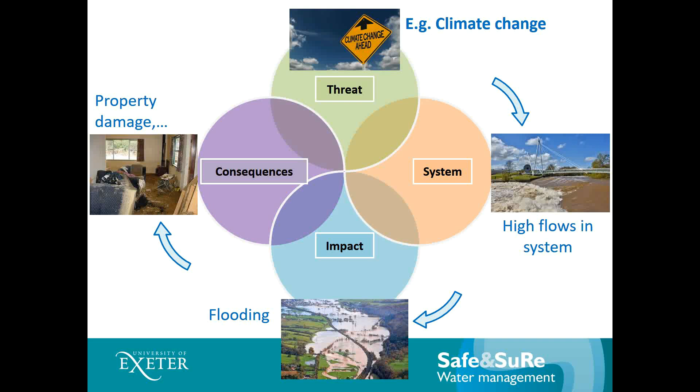And then using this framework, we can try and work out how we might reduce the consequences resulting from any given threat. So firstly, we could look at the intersection between the threat and the system, and our first opportunity to intervene here is called mitigation. So we've tried to define all of our interventions very precisely to make sure we're all using the same language. So mitigation we've defined as any physical or non-physical action taken to reduce the frequency, magnitude or duration of a threat. So essentially what we're trying to do here is reduce the size of a threat.

So if climate change was our threat, we might try and mitigate it by reducing our greenhouse gas emissions, and so then hopefully we'll reduce any effects on the system. However good our mitigation measures are though, we're still likely to have some effects on the system. So then we need to move a bit further around the framework, and we could start thinking about the intersection between the system and the impact.

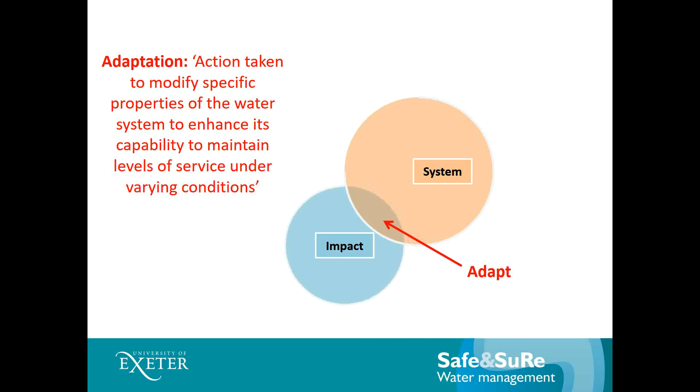And our intervention here is called adaptation, which is action taken to modify specific properties of the water system to enhance its capability to maintain levels of service under varying conditions. So essentially what we're trying to do here is minimise the impact. So coming back to our example, if we've got increased flows in the system, we might need to build flood walls, and then hopefully we'll minimise any flooding resulting from these increased flows. So these adaptation measures have to each address specific system failure modes.

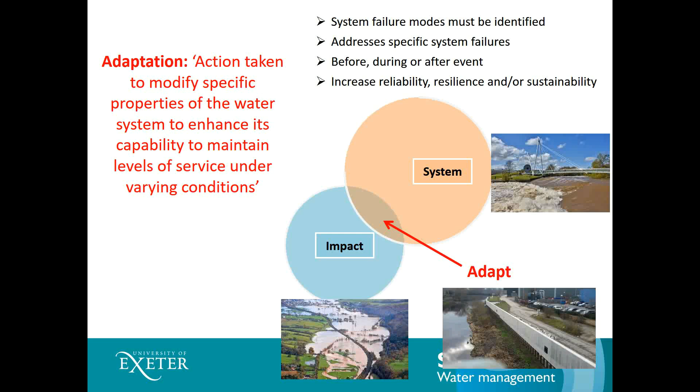And then, as before, however good our adaptation measures are, there are likely to still be some impacts at some stage. So with whatever adaptations we want to use, there will probably still be flooding sometimes. So our next opportunity to intervene looks at the intersection between the impact and the consequences. And this intervention we've called coping, defined as any preparation or action taken to reduce the frequency, magnitude or duration of an impact on a recipient. So essentially we're just trying to minimise the consequences of any given impact here.

So back to the flooding example, if our consequence is damage to the property, we might try and introduce property level flood mitigation measures to try and minimise these consequences. So that would be an example of a coping measure.

Then still, however good our coping, at some stage there will probably still be some consequences. So lastly, sort of completing the circle of our framework diagram, our last intervention is learning, which is embedding experiences and new knowledge in best practice. So essentially that's reviewing all of our interventions and improving them for the future.

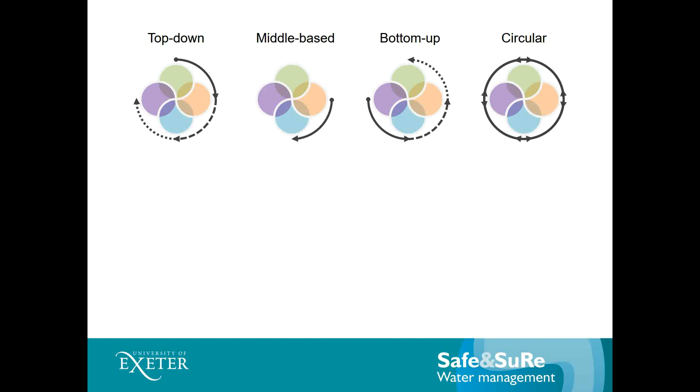So now we've got this framework, there are several different ways we can use it. So we can work with a top-down approach, a middle-based approach, a bottom-up approach, or a circular approach. So just to look at each one in a little bit more detail, starting with the top-down approach. So this starts with the threats and focuses on mitigation of these threats.

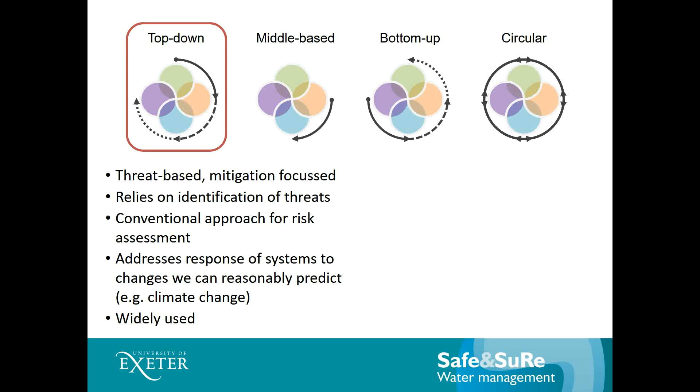So this is the sort of conventional approach that would be used in risk assessment, and it's good for addressing response of systems to changes that we can reasonably predict. The main problem here, though, is that it relies on us being able to identify the threats. So it's not so good for threats we can't foresee, or perhaps ones that are very uncertain or we don't know probabilities of. So yeah, what about the threats we don't know about?

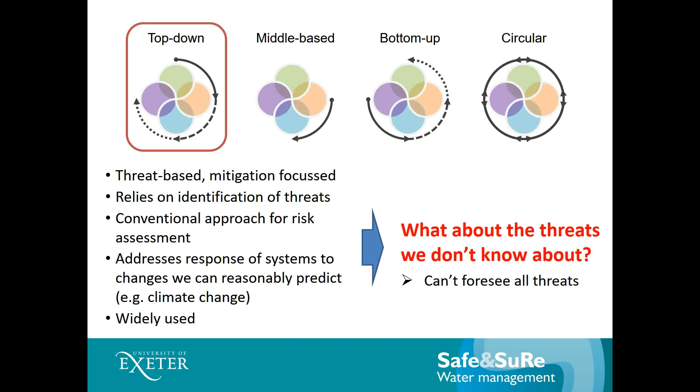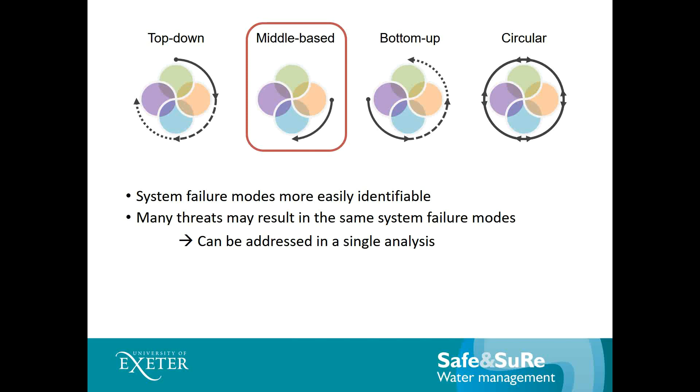So next up we have a middle-based approach, which is focused instead on the system failure modes, irrespective of what threat might cause them. And then next we have a bottom-up approach, which is focused on the consequences and the coping. So this relies on us being able to identify possible consequences and then come up with coping measures for these. And again, this doesn't need detailed knowledge of the threats or the impacts.

And lastly, we have a circular approach, which is very much focused on the learning. So evaluating the success of all our other interventions, our mitigation, adaptation and coping actions, and ensuring that our strategies and actions are updated. So I thought next I would introduce a few of the key concepts developed as part of Safe&SuRe. So firstly, looking at the concepts of reliability, resilience and sustainability, and how these three things are related.

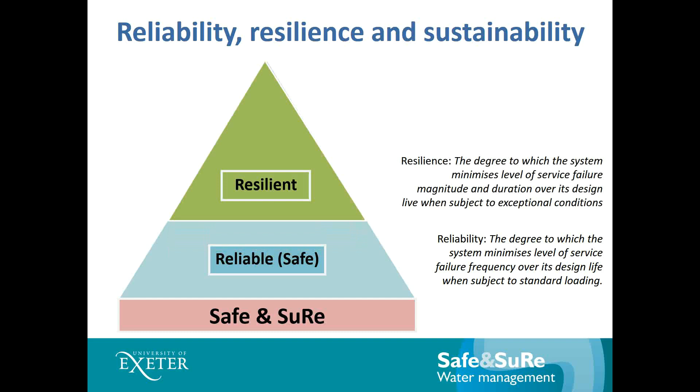And then building upon that, we have sustainability. So the degree to which the system maintains level of service in the long term whilst maximising social, economic and environmental goals. So if we look at this pyramid, we could say that in order to be resilient, a system first needs to be reliable. In order for it to be sustainable, it needs to be reliable as well as resilient.

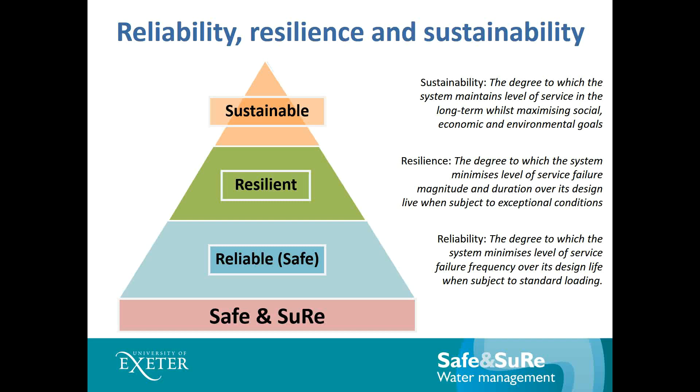We can also look at the different types of events that are addressed by reliability, resilience and sustainability. So this plot here shows the relationship between magnitude and probability of different events. So our low magnitude events tend to be highly probable, our high magnitude events very low probability. So reliability tends to address our sort of everyday events, or at least those that are expected to occur within the design life of the system. So these tend to be our low magnitude, high probability events.

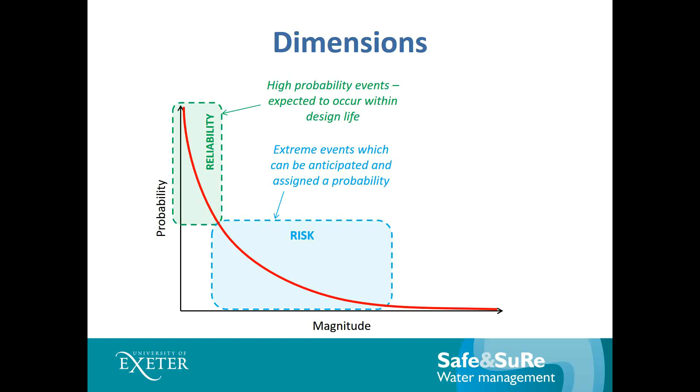I'm also showing risk here because that's something else that's often used alongside resilience. The two are sometimes confused. So risk tends to address our higher magnitude events, but it can only really be used for those that we can assign a probability to, or at least those that we can anticipate. It's not so good for our real extremes, so the things we never knew were coming, or we've got no idea how likely they are.

So really that's where resilience comes into its own. So resilience can address extreme events, including those that can't be anticipated or can't be assigned a probability. So perhaps including our so-called black swan events. And then sustainability on top of that addresses the whole life of the system, so really it needs to capture all of those elements.

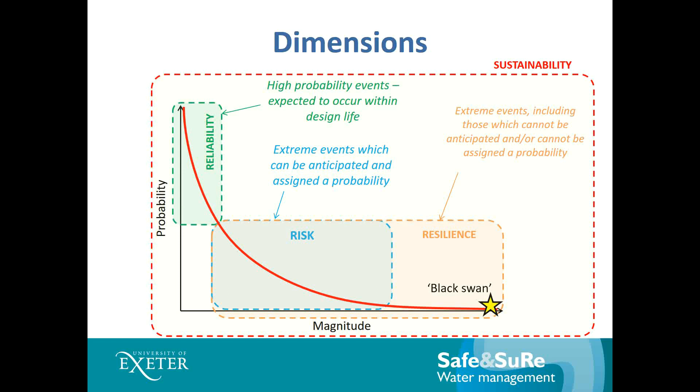Okay, moving on to global resilience analysis, which is a method that we've developed for evaluating resilience, building on the idea that resilience needs to address extreme events. So we use a stress-strain type concept to address resilience, where we stress a system and measure the strain that results from it. So we capture the effects of everything from a very small stress right up to a really large stress, however improbable it might be. So our stress, if we're looking at a sewer system, for example, might be the number of pipes in the system that are blocked.

So we could start from 0 pipes blocked right up to 100% of pipes in the system blocked, however unlikely that might be. And then our strain would be some measure of the level of service failure, so, for example, flood depth. So this red line here represents a vulnerable system because a small stress results in a very large strain. Ideally, what we want is something more like this green line, which would be a much more resilient system. It can withstand a large stress with just a small strain.

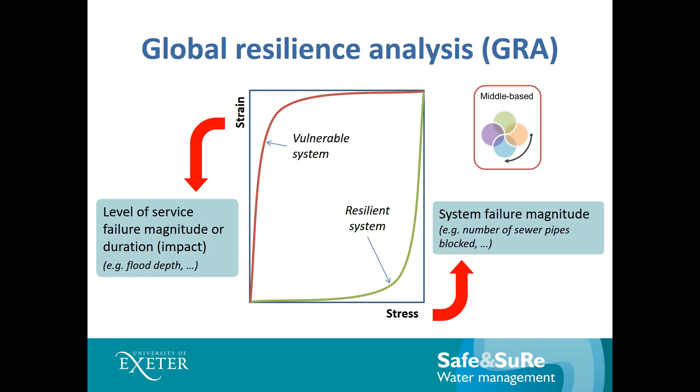So this is an example of a middle-based approach because our stress here is a system failure mode rather than a threat. And then we're looking at the impact of this system failure mode. So an example of how we might use this: this is a piece of work looking at the effects of different adaptation measures in an urban drainage system. So we might adapt our system by providing centralised storage, or we might provide decentralised storage, and then our impact could be measured in terms of flood volume.

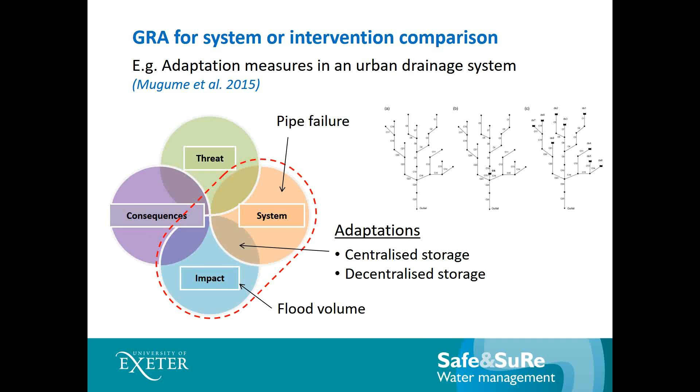So some example results here. These are our stress-strain type curves. On the x-axis we've got the percentage of pipes in the system that have failed, from a very small stress magnitude right up to the maximum theoretical possible. And then on our y-axis we've got our flood volume. So you can see the black line represents the base case, the unmodified system. The red line shows what happens if you introduce centralised storage. The blue line, what happens if you introduce distributed storage.

So you can see that if we looked at normal conditions, so 0 pipes failed, both of the interventions provide some improvement. But when you start looking at our larger stress magnitude, so our larger proportion of pipe failures, only the distributed storage provides much benefit. So you could say from this that providing distributed storage is a much better way of increasing the resilience of the system. So that's an example of how we might use global resilience analysis.

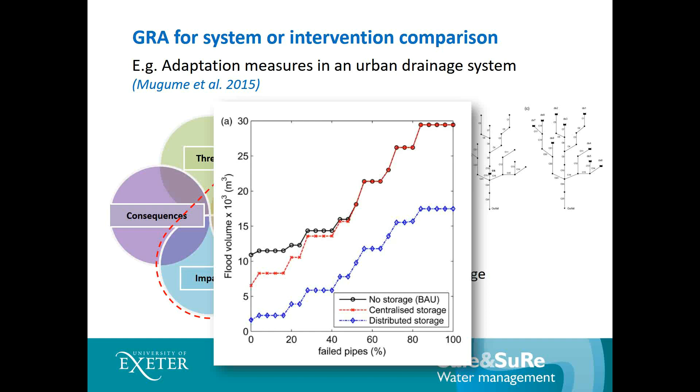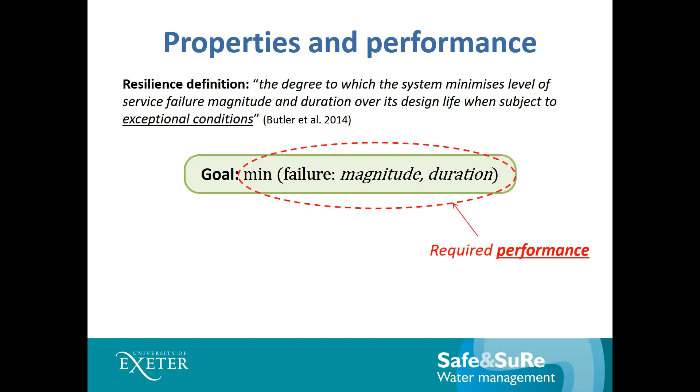The next concept I wanted to introduce was the distinction between properties and performance, which is something we've worked on quite a bit. So we have our definition of resilience, which is the degree to which the system minimises level of service failure magnitude and duration over its design life when subject to exceptional conditions. So we could say from this that the goal of resilience is to minimise the magnitude and duration of failure. So this is telling us what the required performance is. It's not telling us how to achieve it.

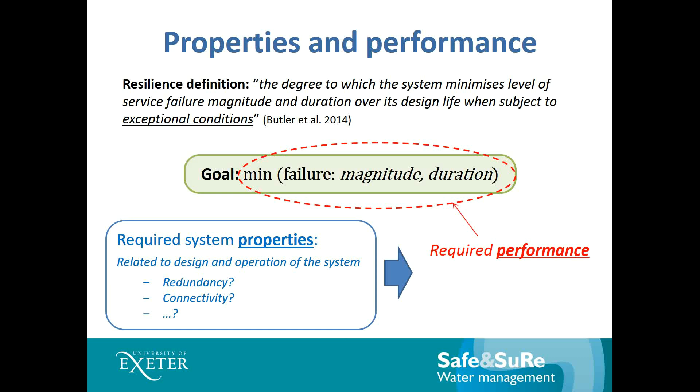So how to achieve it is where the properties come in. For example, we might improve the performance by increasing redundancy in the system, or perhaps something like connectivity. These are often things that are associated with resilience, but actually they don't guarantee an improvement in performance. So we've done a bit of work looking at the relationship between the properties and performance of a resilient system. One of those is working on a set of 250 sewer system case studies, and looking at properties and performance in each one.

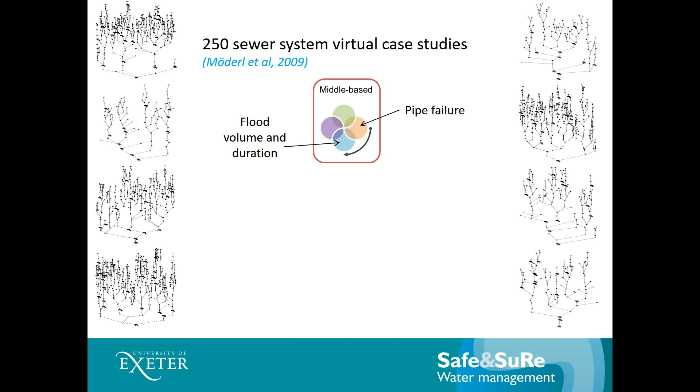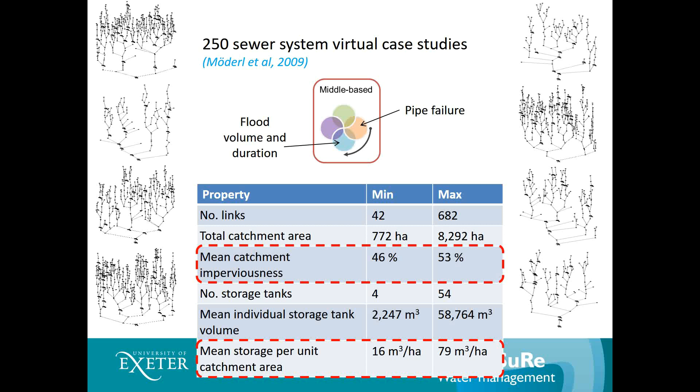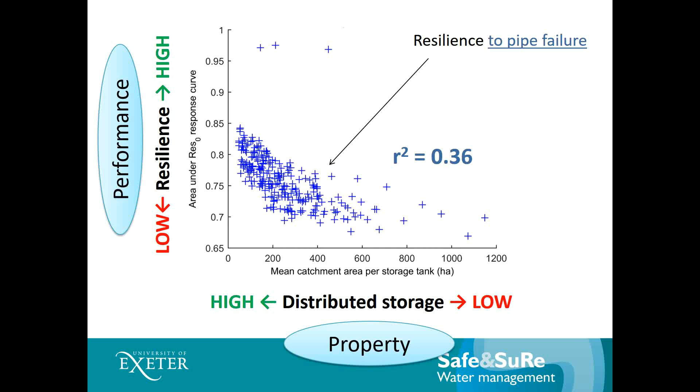So this was looking at the relationship between distributed storage and resilience. We can do similar for the relationship between imperviousness and resilience. And this time you can see that there's next to no correlation between the two. So we can see from this that providing a specific property might be useful sometimes if we're trying to improve resilience, but we can't guarantee that providing any given property will improve performance.

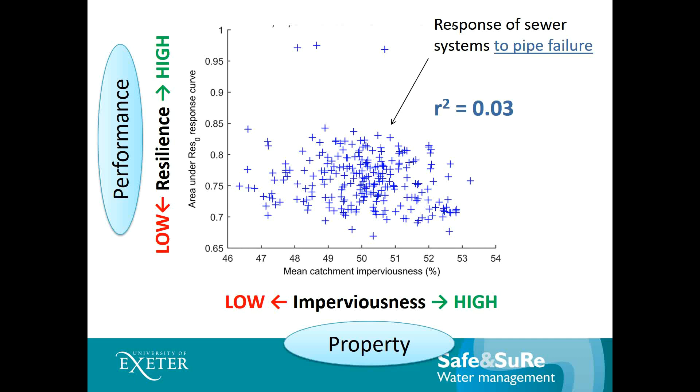Okay, I've come to my wrapping up. Just a few key messages. Firstly, one thing we've really tried to push in Safe&SuRe is the importance of having clear and consistent language. So, for example, resilience is given lots of different definitions by different people. It's important that we all need to be on the same page. And also when we're working with the framework and all our different types of interventions, it's important we've all got an understanding of what each one means and we're using them consistently.

Also, it's important that resilience addresses extremes, so not just our everyday events, which really should be captured in reliability. We need to capture the absolute extremes, also including those that we can't very easily consider in a risk assessment. And then also that providing specific properties doesn't necessarily guarantee resilient performance. So, for example, providing redundancy, whilst it might be assumed that that's going to provide resilience, that is by no means guaranteed.

And lastly, just really to summarise some of the key things from Safe&SuRe. So Safe&SuRe provides a framework that links threats to consequences. It provides a set of clear and consistent definitions. It allows us to carry out analyses in different directions, so for example our top-down, middle-based, bottom-up and circular, and using these it allows us to develop a range of different strategies to increase resilience.